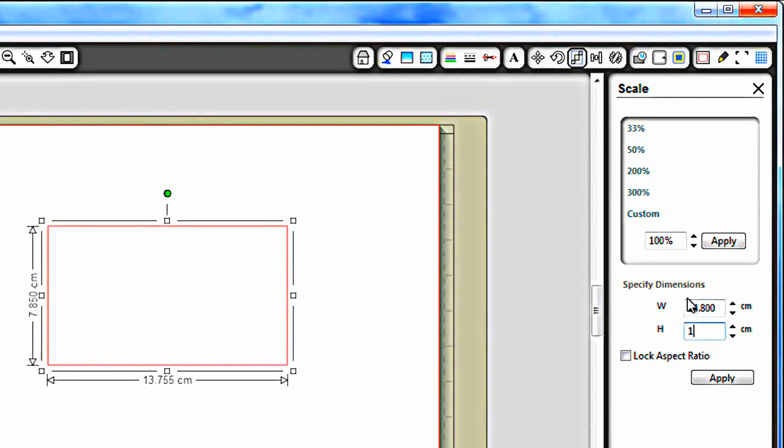You don't need the expensive machine to do this particular design. First, I'm going to go to the rectangle tool and draw a rectangle. I'll select it and go to specify dimensions - I know I need it to be 14.8 wide and 10.5 high. That shape represents the base card. I won't actually be cutting this shape, but I need it to figure out where I'm going to put everything else.

This card I want to have some windows so you'll be able to peek through into the inside of the card. So there's going to be 3 windows on this card just here, and they need to be, let me see, 4.4 centimeters. So I'm going to draw the rectangle and then go down here and specify the dimensions, so I know that square is precisely the size I need it to be.

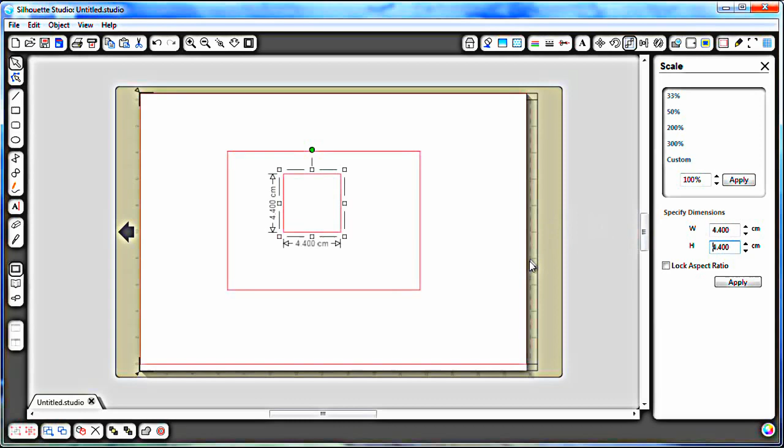I need 3 of these. So again, having it selected, I'm going to go to the replicate tool up here and say row of 3, and that gives me the 3 squares, perfectly aligned as well.

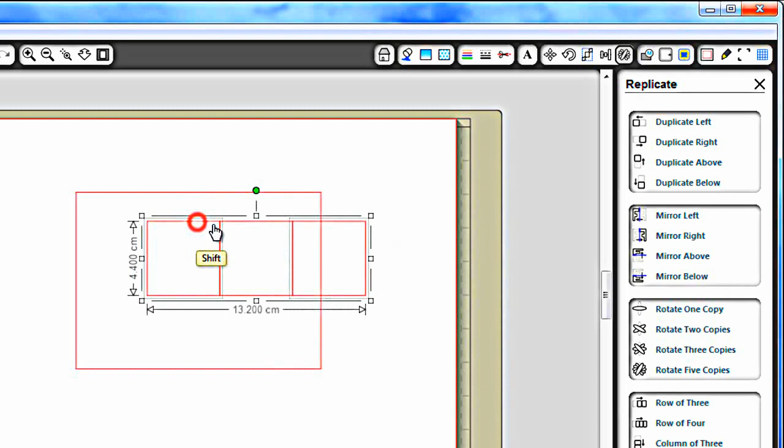I'm just going to select them all, holding down the shift key, and then I can move them on the card base. Once I'm happy with how that's positioned, I can select this one on the right and position it pretty much in the same place.

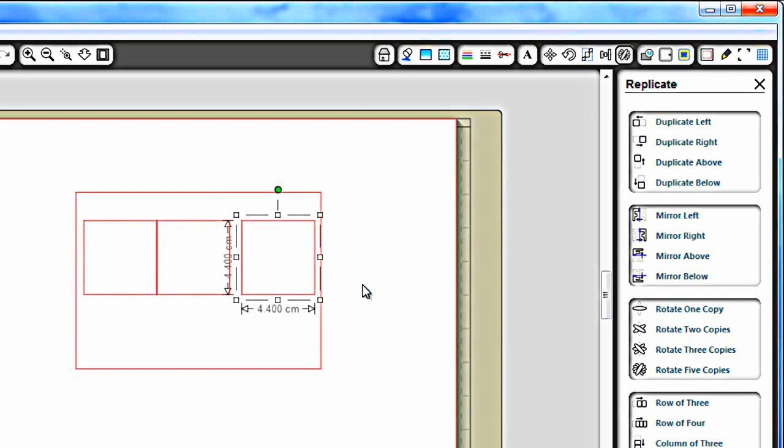So I've got all those 3 selected again, and I'm going to go to this menu here, which is the Align menu, and click on 'space horizontally.' If I click off there so you can see, now these are perfectly spaced either side of the central one.

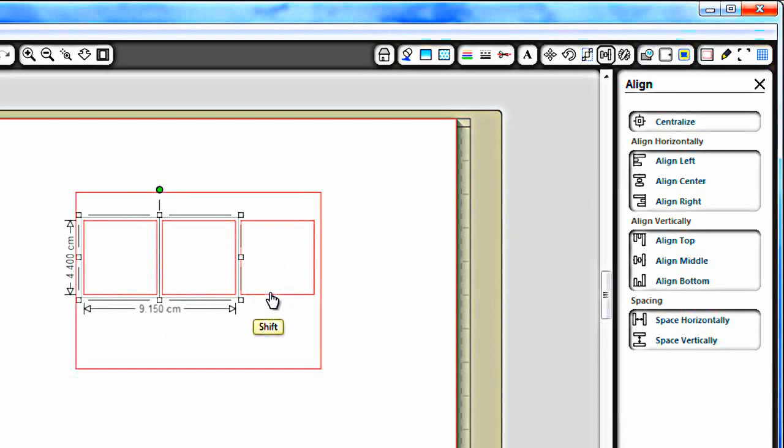So once again I can select them all, holding down the shift key, clicking on the shape, and then hit group, which is Control G. Now it doesn't matter what I do, these are all held together and they're not going to move around where I don't want them to be.

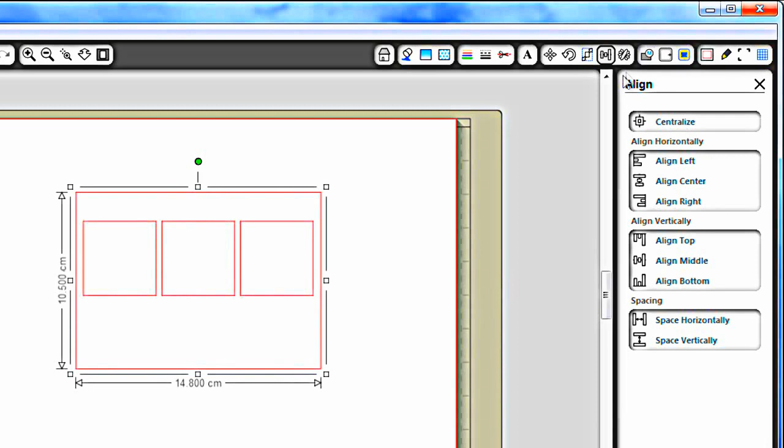So this is the base of the card nearly done. But obviously the base card is going to be twice the size of this rectangle. So I'm going to select this rectangle, go to the replicate menu, and put duplicate above. Now I've got 2 rectangles, which if I select together and go to modify and weld, have now created the full base card.

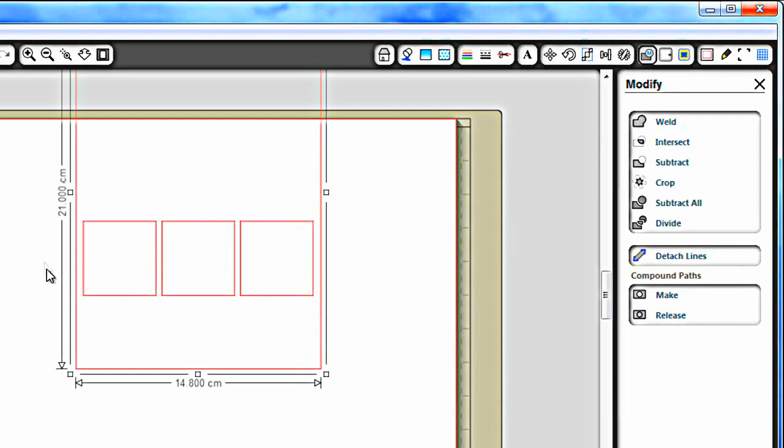So if I select everything now, Control A, just to make sure they're aligned properly, I'm going to hit Align Center. I don't think that actually did anything, so it must have been right already. Then again hit Control G to group them all, and that is my base card completely finished now.

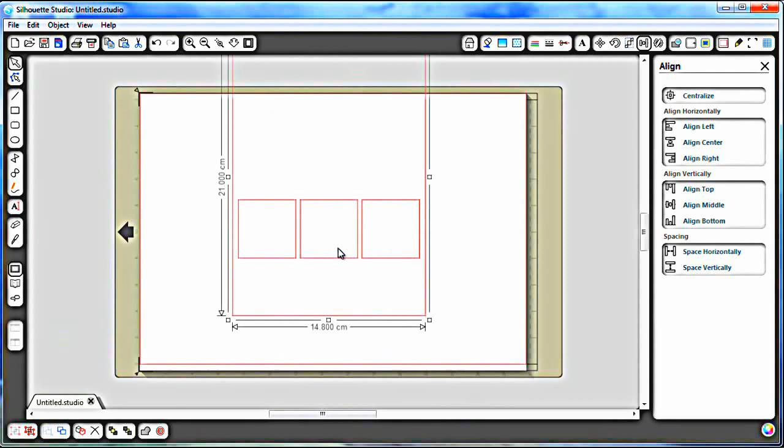So I'm just going to move it off to the side. Actually, I've just realised I do still need this - I need these 3 windows in the middle. So I'm going to highlight it again, right click and hit ungroup, and use these here. Again, I need to ungroup them, right clicking on these and hitting ungroup.

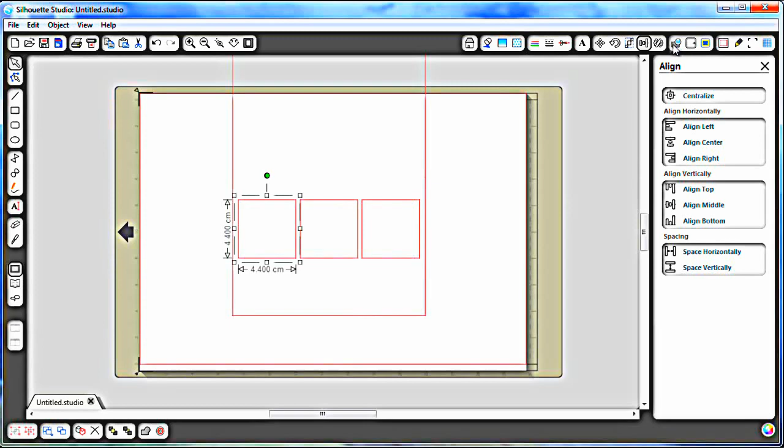Then I'm going to select one at a time and go to the - which menu is it? Internal offset. And then I'm going to offset it by 0.1 centimeters and hit apply. I'm going to do that for each of these. You'll see where I'm going with this in just a second.

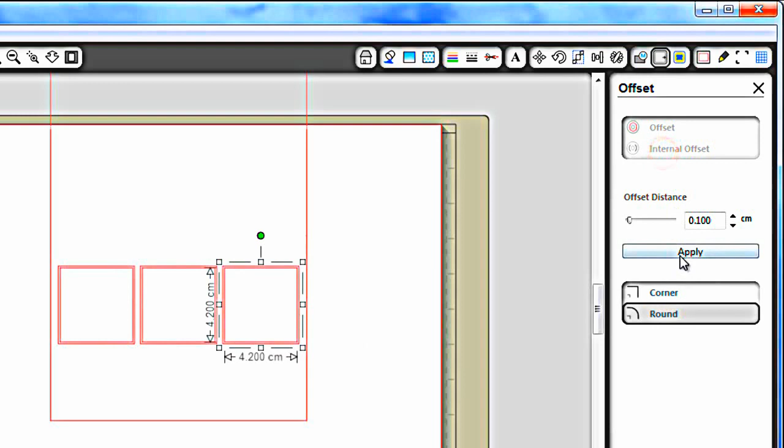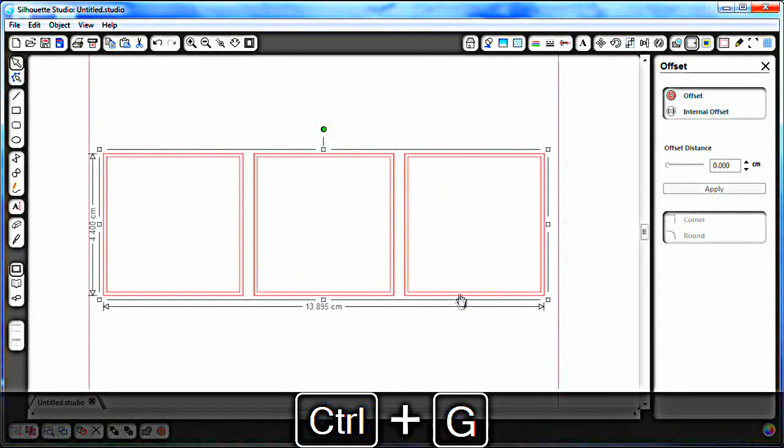Okay, so now I need to zoom in because I can't see what I'm doing. I just need to select the larger of the rectangles, the squares, by holding Shift and clicking on them. I'm going to regroup those because I don't want them to move, and I'm also going to select the base card at the same time and regroup that. Then I can just go ahead and shift this off screen.

And these 3 that are left, I absolutely definitely now need to group them. I do not want those to shift because I know they're exactly the right position to be frames for those 3 square windows in the base card. Let's just zoom back out again.

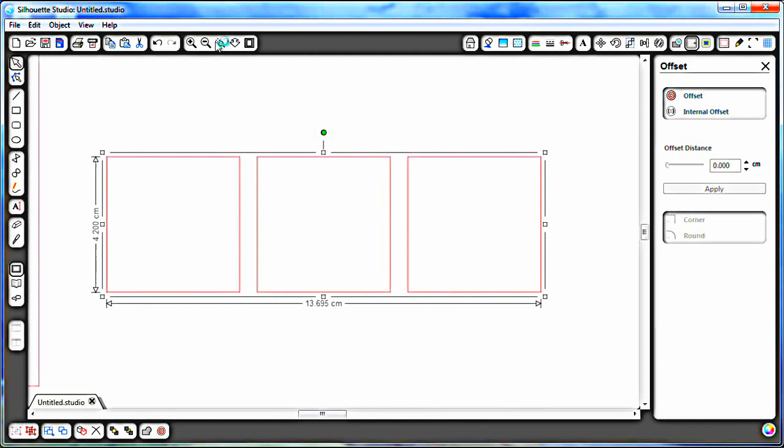Next up, I need to do - well, I'll just show you on this. The idea is there's going to be a piece of pattern paper that goes across the windows, giving some windows you can see through to look into the inside of the card. So I need to create that around these 3 squares.

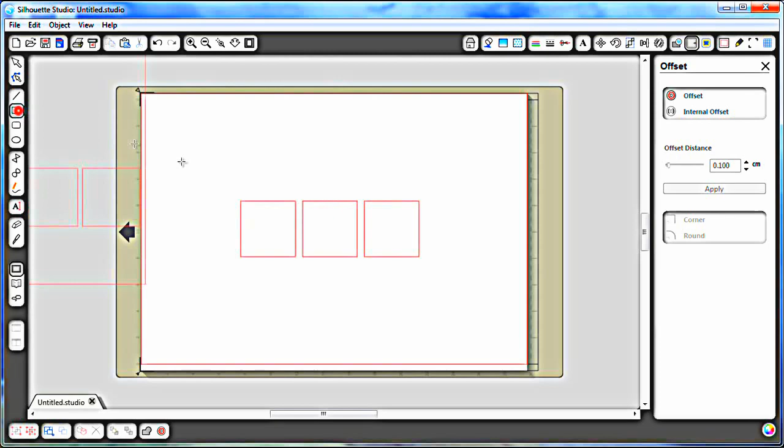I'm going to go to the rectangle tool, draw a rough rectangle, go up here to my scale window, and specify the dimensions. It needs to be the full width of the card, so that's again 14.8 centimeters, and I'd say probably about 6.3 high.

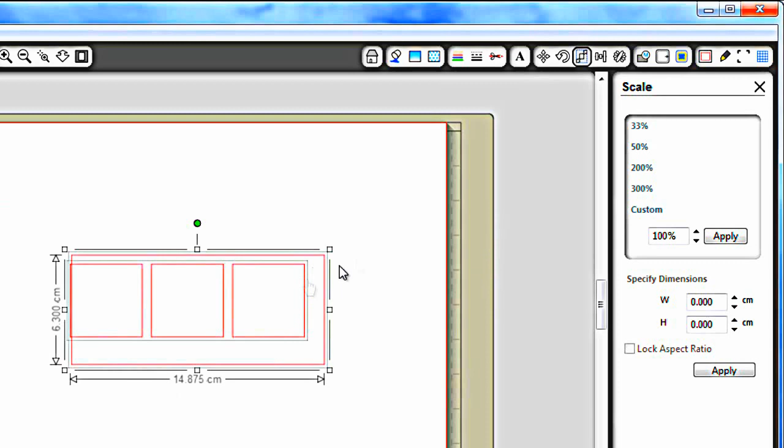So select both of those - you can draw a marquee around things to select them all, or hold down the shift key and click on each object. Then go to align center and align middle, and now you can see that's given me a perfect frame, like a film frame, around those squares. Again, highlighting them all, Control G to group them.

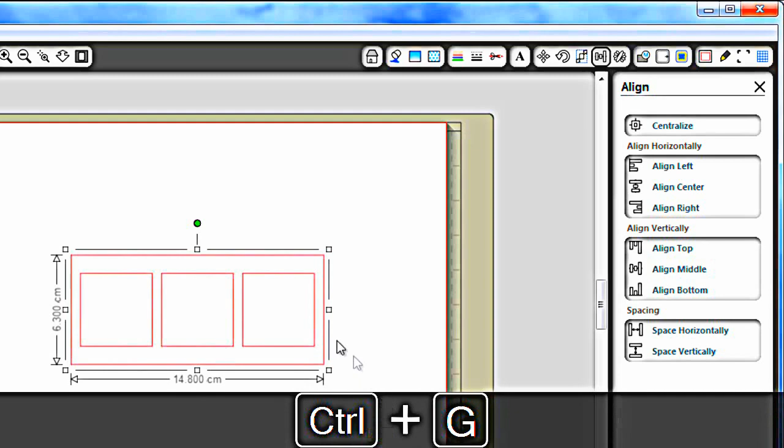And that is actually all the things I need ready to be cut on my craft robo. As I say, you could just cut these out using a craft knife and ruler, but if you've got the machine, you might as well make the most of it. So I'm going to go ahead and cut these out, and I'll meet you back at my craft desk and show you how I put the card together.